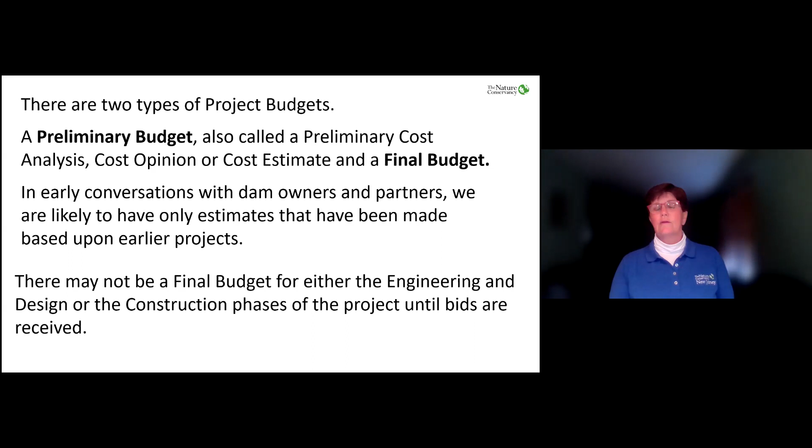And as we step through these early discussions, trying to figure out what exactly our budget is going to look like, one of the most common things that we do is turn to other similar recent dam removals that are local to the one we're working on and try to get a look or talk to our partners about that project budget. It's important to know that, and you kind of have to get comfortable with the fact that you don't really have a final budget until you bid the job, because the professionals who are actually doing the work, whether it's the engineers or the contractors, are going to bid based on the current situation, current cost of things, and in the case of the engineer, your specific regulatory environment. So you'll be fairly far along before you get a final budget.

I think, like all models, they are useful. However, it's going to really be focused on the stripped down version of a dam removal. So you can get in trouble using these budgets if you rely too heavily upon them. So I think that they are useful in the sense that they will give you kind of the lowball estimate.

But where you can get in trouble using these estimates is to kind of believe that you're seeing the full picture. What you'll need to do is to pull out those features about your specific dam removal that might bring the cost up, and really explore those issues. And our next presenter will give some examples of those factors that can influence costs and how to avoid underestimating those costs. Be aware that the issues will vary regionally. It depends on the characteristic of rivers, the concentration of infrastructure, and the regulatory environment that you're dealing with.

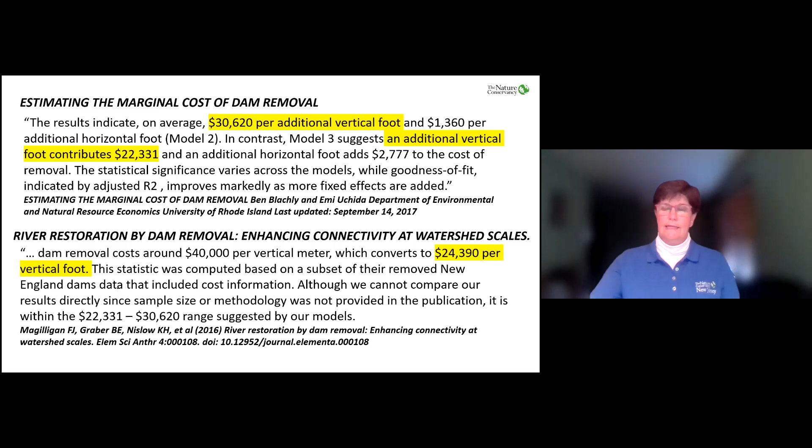So I realize that up to this point, I seem to have said, you really need an estimate. Here's a way to get an estimate, but don't use this way to get an estimate. So not very helpful. So I'm going to kind of step through a little bit of how exactly we go through that very early estimate. So again, with help from partners, we try to just figure out what line items are going to be in my budget when I look at this particular dam removal. Then I'm going to look to similar recent projects in the region to get the costs that would be associated with those line items. And that is going to get me to a preliminary budget.

So here's some examples. Do I need a mussel survey on this specific dam? Is it hard to get in? Am I going to have to build an access road, clear an access road? Is it steep? Or maybe we're going to just pull up right next to the dam. Is there a lot of sediment? Is there nearby infrastructure? These are things that partners and owners can brainstorm together.

So if you know that you may have these issues, then you can start to figure out, what is it going to cost me to truck sediment? Is it clean sediment? Very different price than if it is not clean sediment. What is engineering and design going to cost? What does permitting cost on a similar project? So again, we take all of those pieces, working with partners, and that allows us to create a preliminary budget.

So if you get this far and you have a preliminary budget that seems to make sense, and the dam owner and partners that you're working with are comfortable with this, saying, okay, that is whatever, $500,000, yeah, I think that we can do that. At that point is when you really need to start to nail down those costs, because once you start to seek funding, you're going to need more than what I've just explained when you're reaching out to funders.

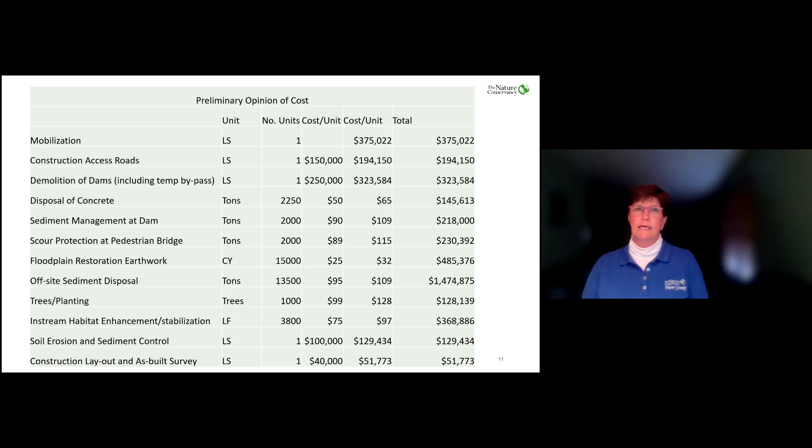But also, I think there are a ton of partners out there that you can reach out to. Certainly, it's what we do all the time. Hey, you just did something where you had to go down steep slopes, clear half a mile of trail. What did that run? You can start to get these ballparks from folks.

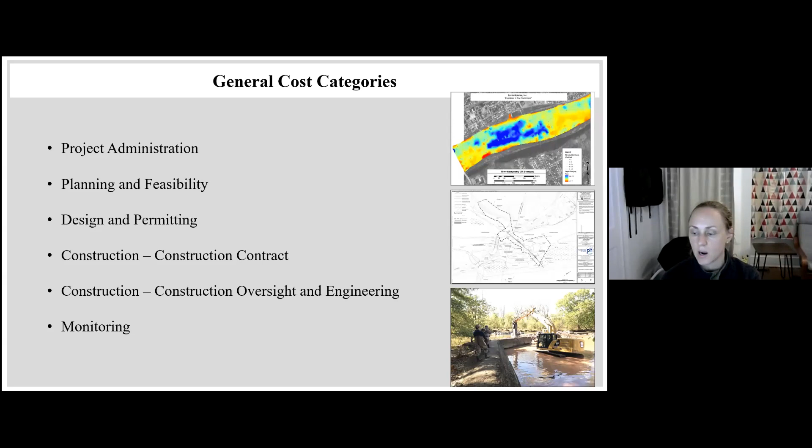Yes, today I'm just going to talk about basically general dam removal costs and cost categories, and try to give you a rough eyeball method that you can use, so you can go out into the field and kind of eyeball the magnitude of dam removal costs that you may be looking at.

On this slide, these are just general cost categories that apply to most dam removal projects. Costs can vary widely based on project-specific complexities or by region, as we know. And these categories can be lumped together or broken down in slightly different fashions, but in some sense, they're what we typically see for a dam removal project.

First, we have project administration costs. We do know that dam removals take a lot of administrative time, but despite this being a significant cost for project development and management, administrative costs are often overlooked or simply not calculated. Internally, in discussions I've had with other service members and with other federal agencies, frankly, we just don't have a great grasp on this, and often our time is not tracked.

We also have costs associated with planning and feasibility. So again, as Beth said, that's mapping, H&H studies, geomorph, bathymetry, sediment analysis. This is usually where we're getting a conceptual design and getting an initial cost estimate.

We also have costs associated with final design, permitting, and compliance, and costs associated with construction. A lot of times we break up construction into our actual construction contract. And again, as Beth mentioned, I'm emphasizing here, we don't really know our final project cost until we get that project out to bid. Also for construction, we typically have costs associated with oversight and engineering.

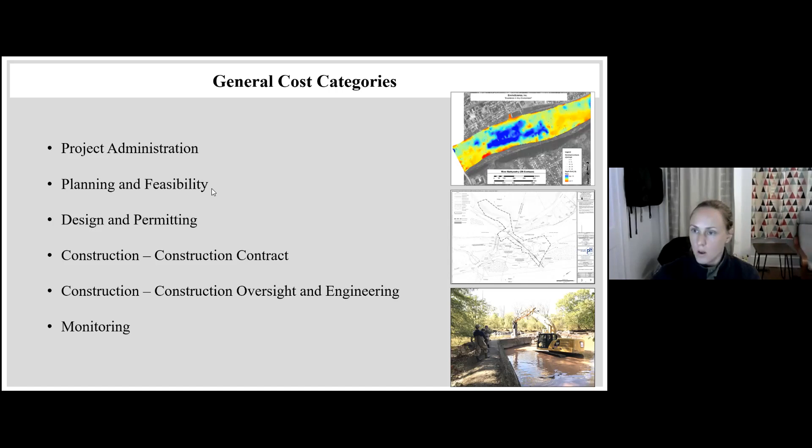Okay, so what I'm presenting now is hardly scientific or peer reviewed, but it's a decent way to start just thinking about factors that influence dam removal costs. When I go out to a site, some of the major issues that I think about on that initial visit are, number one, dam size and dam type. Typically, the bigger the dam, the higher the cost. And typically also concrete and other structures of dams are more expensive than earthen removals or timber crib removals.

I look at site access. Can we get equipment into the site? Do we have a reasonable staging area? Because difficult access can mean higher cost. Again, as Beth said, I look at sediment. Is there a lot to deal with or a little? Are there indications that it might be clean or it might be contaminated? Because costs associated with dredging, removal, and disposal of sediment can get quite high.

I also look around at the surrounding area for infrastructure. Are there major potential elements to contend with? Are there roads and bridges that may require scour protection? Are there other infrastructure elements like pipelines that may need to be moved or dealt with otherwise? So those are some of the major issues that I look at.

Other issues that are in no way small beans, but should also be considered, are dam ownership. What do we know? Do we have access? Is it possible that we may have to do some kind of buyout or easement? Species of concern, for example, do we need to do mussel surveys and relocation or any kind of other special measures for imperiled taxa?

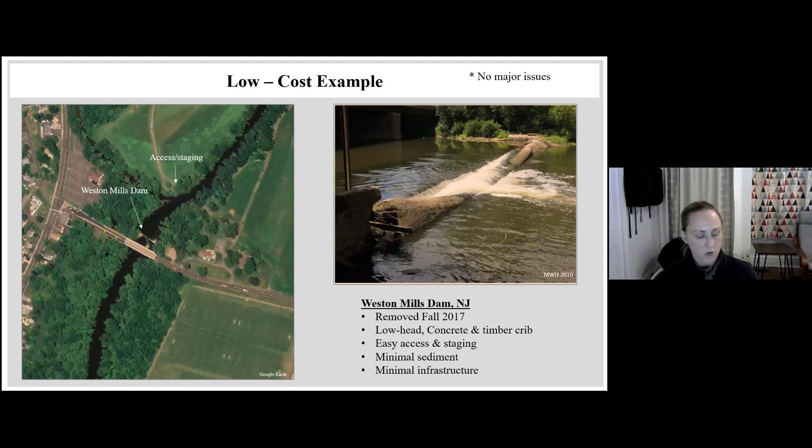We did have some infrastructure, but that included a county bridge that required minimal scour protection. And then we were going to leave some residual dam walls, abutment walls that required a little bit of scour protection. So the overall design here was basic dam removal, minimal scour protection around the bridge and abutment walls. As far as those other issue costs, there really were none associated with this project.

So the cost estimate on this one, again, in New Jersey, Northeastern region, was about $1.5 million total. That's in 2017 dollars. Administrative costs, completely unknown. We have no idea. We didn't track them. Feasibility cost was around $250,000, design $150,000, construction itself around $1 million, and then monitoring $150,000.

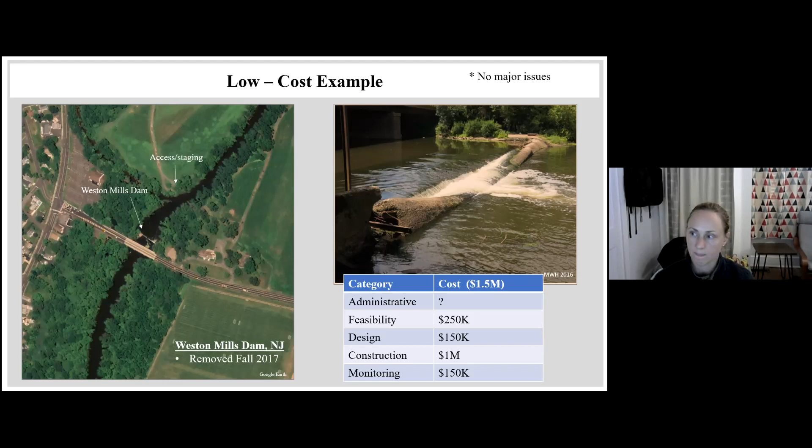So next, I'm jumping to an intermediate cost example. This is the Nunn's Mill Dam on the South Branch Raritan River, again in New Jersey. This is underway but not complete. So the dam size, the entire dam was 150 feet long. That included a 40-foot concrete gravity spillway that's about 6 feet high, and then a 110-foot concrete and earthen embankment extension off of that. This thing retained about a 3-acre impoundment that's heavily sediment laden.

Access here, very easy. Staging can be done on privately owned land, but it will require an access road of about 300 feet. Sediment is the big issue with this project. We have extensive sediment in the impoundment, and it's possible but yet unknown if we can reuse or dispose of it on site. Infrastructure is kind of an intermediate problem here. We have a downstream county bridge that's going to require some scour protection, and we have some properties that may also require some flooding protection.

So the general design is a little bit up in the air, but it'll probably be a basic dam removal. We're going to realign the river to its native channel, and we'll have to do some manipulation of the sediment to either reuse it or dispose of it on site.

As far as our other issues, costs, we have possible species of concerns. We'll probably have to do a mussel survey and relocation, which can run 10 to 30,000 in our area. This is located in a historic district, so there will be costs associated with cultural resources. And because of the sediment, it's likely that we'll have some adaptive management contingencies where we might have to do future construction actions dealing with sediment management.

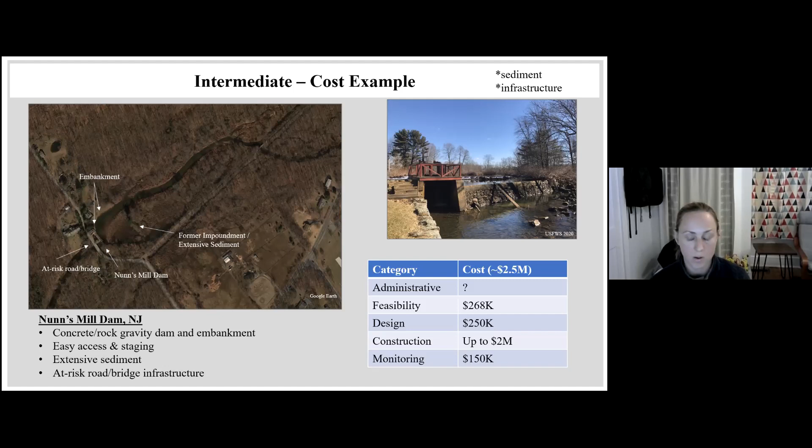Our cost estimate on this one to date is around $2.5 million. Again, administrative cost unknown, feasibility around $270,000, design $250,000, construction up to $2 million. It really depends on how we deal with the sediment, and monitoring again around $150,000.

This is the second intermediate cost example. This is the Headgates Dam on the main stem Raritan River. This project's not complete, but we have a lot of information. So dam size, kind of a medium-sized dam. It's a low head, about 250 feet long, 14 feet high. Access is intermediately difficult. We're going to have to build an access road of about a half a mile, but it's on very flat terrain. Sediment on this one is very minimal, so not a big issue.

And then we have infrastructure, and this is our big problem on this dam. We know that there's a major 54-inch sewer line located about 90 feet upstream of this dam. So when that dam's removed, the sewer line that is now buried is going to be exposed, and it's at risk of integrity loss. We also have an adjacent historic power canal, and we know we're going to have to modify the intake structures on that power canal to maintain historical and recreational use of the neighboring property.

So the overall design here is it's a little bit bigger dam. So we're going to do a dam removal with likely coffer dam installs. We're definitely going to have to relocate that sewer line, rebury it, and do modifications to the power intake structures on the power canal. For other cost issues here that we've identified, this is adjacent to two historic districts. So there's going to be cultural resource costs. And we also think there may be some possible community resistance on this dam.

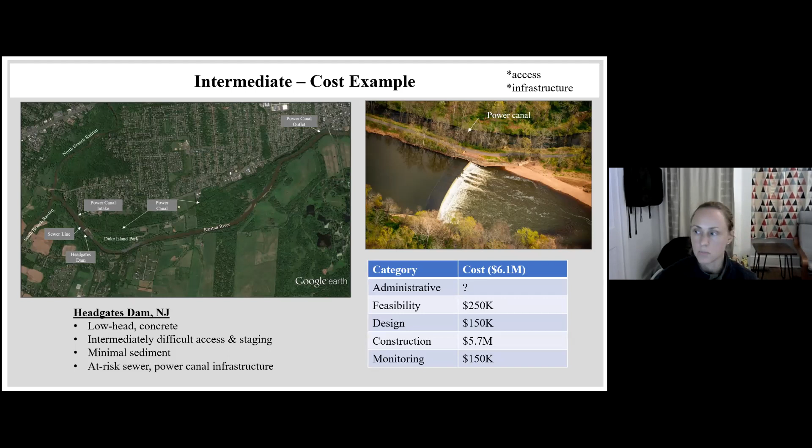Overall cost estimate is going to be 6.1 million total, including unknown administrative cost, feasibility already been done around 250, design 150,000, construction total around 5.7 million. That includes 1.1 million for the dam and about 2 to 2.3 million each for that sewer line relocation and modifying the power intake structures on the power canal. And then monitoring approximately 150, maybe a little more.

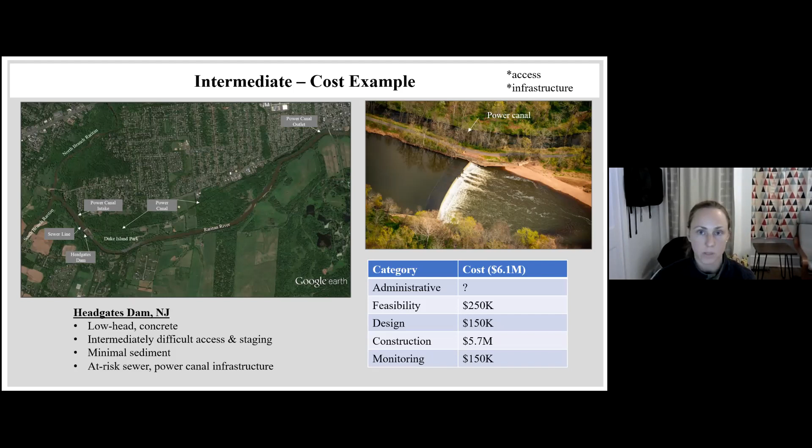Next, I'm moving on to a high cost example. This is the Columbia Dam on the Paulinskill River in New Jersey. This one was removed in 2020. Dam size here, we're actually dealing with two dams on this project. One was just a breached remnant dam that was located downstream. And then we had the Columbia Dam, which is our primary dam, which was intact and pretty large. It was 310 feet long, 18 feet high, and it retained about a 45-acre impoundment. For this, I'm going to actually talk about the design first, because this was a complicated project, and then I'll get into access and sediment.

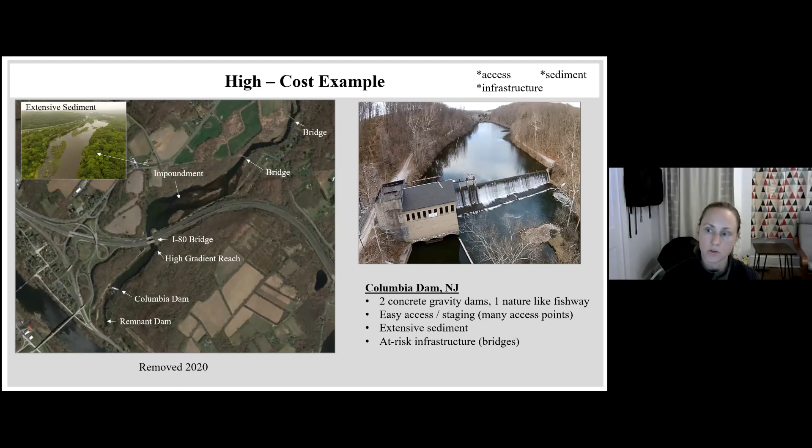But this project included two dam removals, an extensive impoundment drawdown, extensive scour protection along 3 bridges, one of which was Interstate 80, which is a major bridge that runs from California to New York, and also at 2 upstream bridges, one of which was a historic bridge. We had to do a nature-like fishway install underneath the Interstate 80 bridge because our feasibility showed that that was going to be a really high gradient, high velocity area after dam removal. So it was going to be unable to pass fish. So we had to do a fish passage install. And we also had to do extensive channel restoration and extensive impoundment replanting.

So now back to our major factors here. For access for this project, it was actually easy access, easy staging. However, we had multiple access points to contend with to complete all of our work. For sediment, looking at this one, extensive sediment in the former 45-acre impoundment. However, we got a little bit lucky and no offsite disposal of sediment. We were able to dispose of or stabilize it in situ.

Infrastructure was another real biggie. As I mentioned on this project, we had extensive at-risk infrastructure with those 3 bridges, which required a lot of scour protection. We also had a multitude of other cost issues on this one. We had mussel surveys and relocation that ran about 30,000. We had cultural resources. We had 3 historic properties on site, including the dam and powerhouse itself.

We had a dam ownership cost. We had a FERC license buyout. We had very high community resistance, so we had to do a lot of outreach on this one. We had monitoring, permit, and otherwise required for this one.

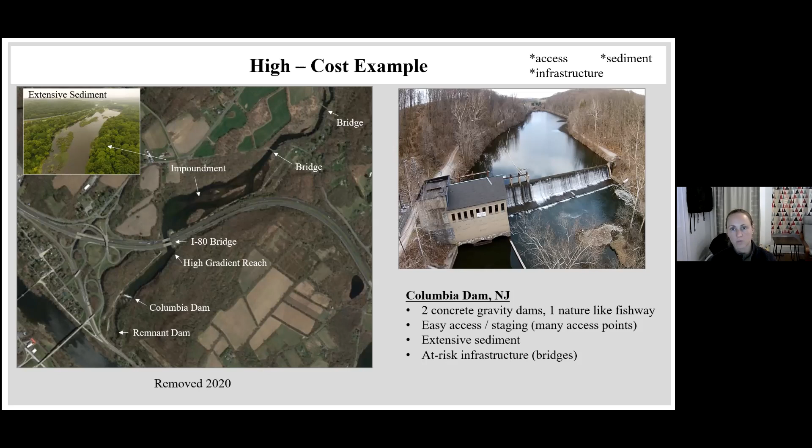We had potential for high adaptive management costs, which we didn't have to do, but there was potential high costs with future modifications that may have occurred. We had impoundment issues. We had a long drawdown process. And again, as I mentioned, we had fish passage issues associated with cost in that high gradient area and having to do modifications for a nature-like fishway.

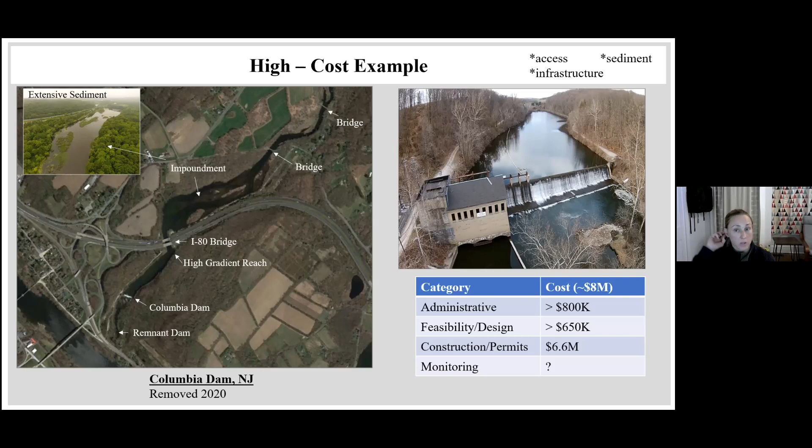Total costs for this project were around $8+ million. These are lumped a little bit differently than the others, but administrative costs, again, were quantified for some entities but not others, but we know that it was greater than 800,000. Feasibility costs, FERC license buyout, and design were at least 650, but more, because not all the costs were accounted for since there was a lot of in-kind work. We had construction and permits, which was around 6.6 million. There was a lot of monitoring, but we don't quite have a dollar amount on that one.

And then this is just my last high cost example, then I'll be done. This is the Warren Glen Dam on the Musconetcong River, again in New Jersey. Project not yet complete, but we have a lot of information. So for this one, dam size, very large. It's about 330 feet long and about 38 to 40 feet high. Access, I put this top left picture in here to show you it's kind of remote, at least for New Jersey. It has very difficult access through a gorge area, possible need for a 1+ mile access road through very steep terrain.

This holds back an insane amount of sediment that we're unlikely going to be able to stabilize or reuse or dispose of on site, so it's probably going to have to be hauled off. Also, some problems with infrastructure. The dam itself is a Class 1 high hazard at risk of sunny day breach. And we also have downstream infrastructure that will definitely be damaged if we release too much sediment. So design is a little bit up in the air, but it will definitely entail very difficult access, dealing with a very dangerous existing dam structure, extensive sediment disposal offsite probably, long impoundment drawdown, extensive bypass with cofferdams and other installations, and extensive habitat and fish passage restoration.

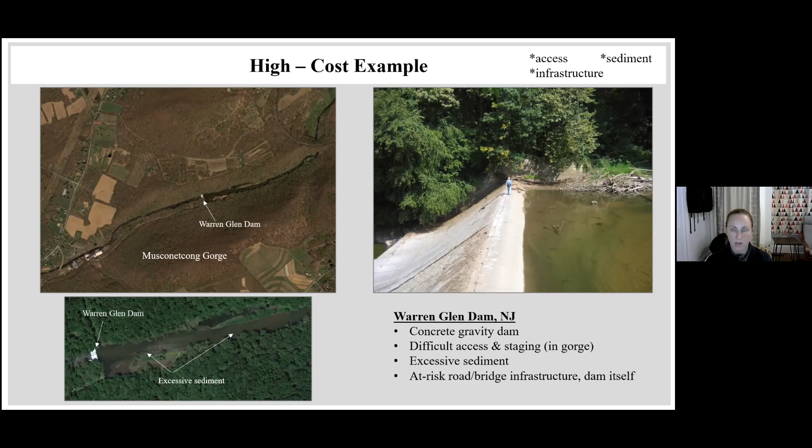As far as other costs, likely costs associated with species of concern, namely mussels. It's not historic costs, except it is adjacent to a wild and scenic reach of the Musconetcong, so there will probably be costs associated with that. Possible community resistance and possible site buyout; we're not sure on that. So this is probably one of our highest costs in New Jersey. We think this one's going to be around 20 million. Administrative costs are kind of a question mark, and we're not great at predicting that. Feasibility minimally 500,000, design very minimally 350,000, and we suspect construction is going to be around 15 million and monitoring 150,000 plus. Thank you.

Hey, Kathy. Yes. Both Beths are talking at you. There was a little bit of a discussion in the chat, and it made me wonder, were these costs done under federal contract? It's a mix and match group. A lot of these that I'm mentioning are being conducted under the Natural Resource Damages Assessment Restoration Program. Some of them were done by responsible party companies. Others were done by the state. Most of them had some federal monies involved, but no, most of them were not under federal contract. All right, great, thank you.

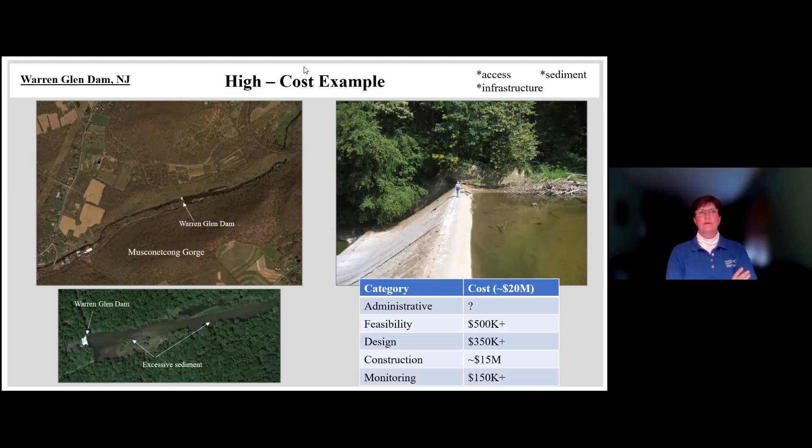I'll introduce Evan while we're getting these last few results in. Evan Madlinger is the State Resource Conservationist with USDA NRCS. Evan is going to talk about developing a budget. It's kind of different when you work with NRCS because they have cost per practice. So they're going to look at your project and come back and tell you what they'll give towards each one of those steps that you may be taking.

So Evan's going to outline that process and also talk about, if I wind up with funding gaps, then what does that mean for my project, and what it's like to actually work by putting a budget together funded by many different entities.

So Michelle, did you end that? Okay, all right, so let's take just another 10 seconds or so to look at that. So currently managing dam removal: yes, no. Yes, I'd like to, but need some training. It looks like that was 50%. So that's exactly the sort of answers that we're looking for. Interested in project manager training, 58 people. So 89% said yes. Again, fantastic information for me to pass along to American Rivers.

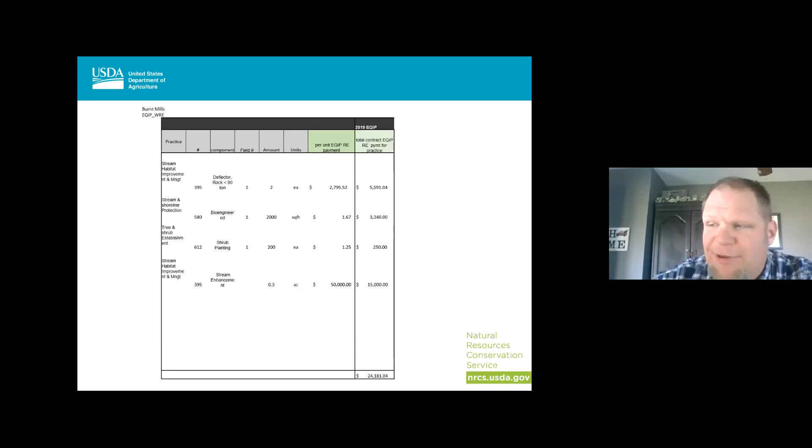The wetland easement portion, kind of similar here. We knew we could pay 100% of the bills, but we gave it an estimate that we're going to need about $25,000 for that portion. And so you can see this is on the smaller end of those projects. We were talking about millions when Kathy was presenting, but we actually got this one out for probably more like 160 or 170 thousand dollars, but we'll talk about some other things with that too. So here's our final one sheet of our final design. We had some other sheets.

We had some more detailed stream habitat improvement, but just to give you an idea of what we're doing there, we were going to channel block off that left channel there and reestablish the main channel where it was historically. We could tell from photos. We're going to shave back that island a little bit, put some material up in the front, get some root wads in there. We had some deflectors, might be a little hard to see, or might not even be on there. And again, there's some other stuff too, something to get into with some other sheets, but just to kind of give you an idea.

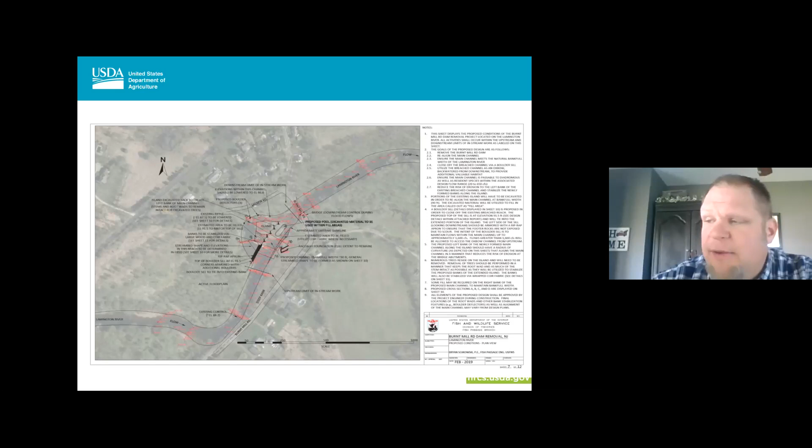And you may notice here that this is an NRCS project, but there's a Fish and Wildlife logo down at the bottom there. And so when we talk about partners, NRCS, we do have our own engineering staff, but it's not very big, and they have a lot of agronomic projects they were working on. So anyway, in this particular case, one of the huge things that U.S. Fish and Wildlife Service helped with is their fish passage engineer actually did this design. So that's just one note, right?

When I said this project was maybe 160, 170 in the end, that engineering was essentially free to the landowner, but somebody paid for that. Tax dollars paid for that, an engineer for U.S. Fish and Wildlife to do that. So in this particular project, that's probably a cost that we're not accounting for here. Kind of what Kathy was saying with administrative costs.

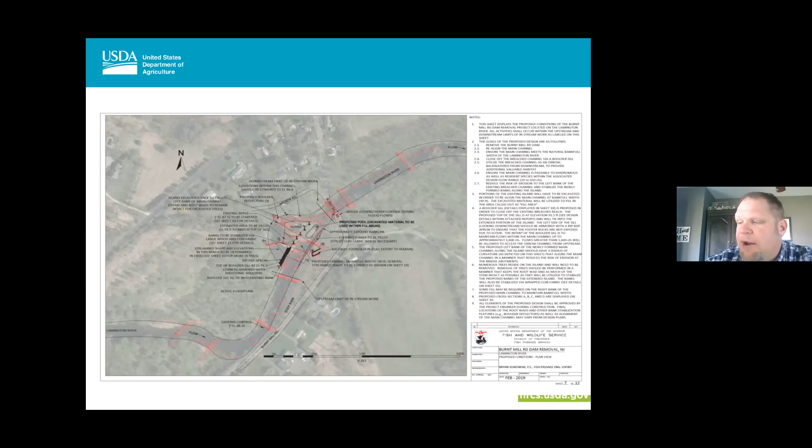Well, in '17, they didn't really have a good layer at the time for aquatic habitat. So when we looked at the Landscape Project, we didn't get any hits for mussels, and we made the assumption that we might be okay here when it comes to mussels. Well, flash forward to when the project was actually getting designed, new layer, we tripped up, we realized we had some mussels here. And not only that, they had done some extensive monitoring work for mussels here. So this turned out to be a major thing that we had to work with on this project.

To the point where Division of Fish and Wildlife wasn't even sure they were going to let us do this project. It took several sit-down meetings, a lot of back and forth, some modifications of the project. We had to really minimize our stream habitat work upstream and downstream. It really had some implications with the sediment that was accumulated there and how that was going to get treated.

And so this is where U.S. Fish and Wildlife came in huge, because I was able to sit at the table, not just myself and NRCS folks, but we had U.S. Fish and Wildlife there. And between the two federal agencies, we were really able to gain the confidence of Jersey Fish and Wildlife and gain their support for this project. So that was huge.

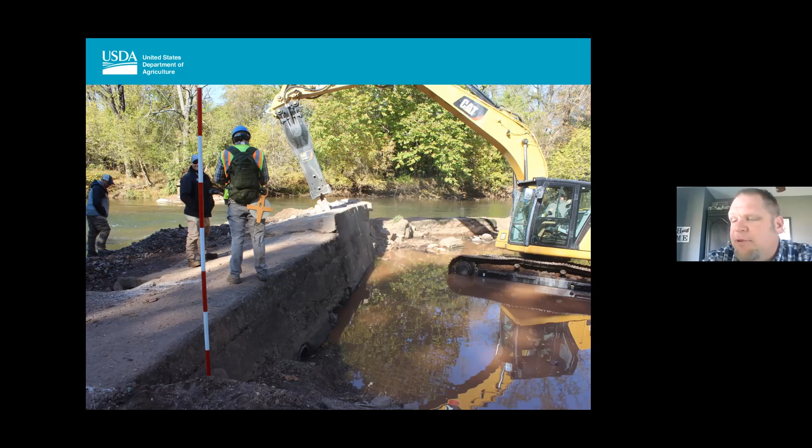So fortunately, this thing was in pretty rough shape and it did break apart a lot easier than it started looking like in the beginning. But I started sweating some bullets here too, because this was starting to look like it was going to take a lot more time to take this dam out than we originally thought. And having the machinery on site and the time and the labor, I was starting to get a little nervous. This could add up quickly. But again, it did actually end up coming out relatively quickly. But again, one of those things that all these experts on site, myself included, looking at these things, you didn't really know until we got into it that it wasn't exactly what we thought it was.

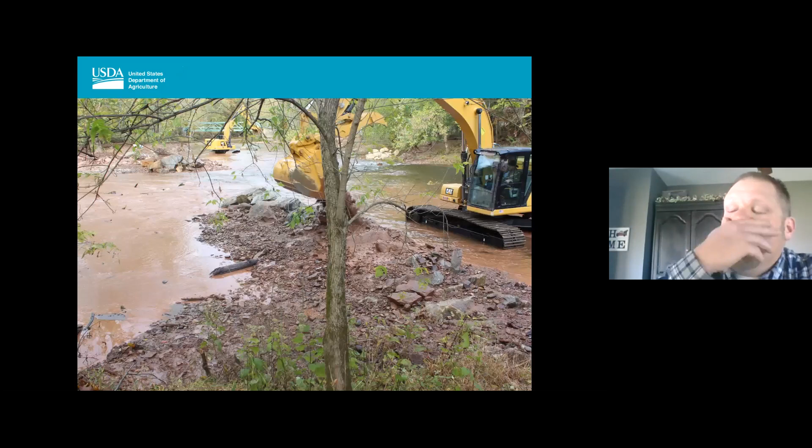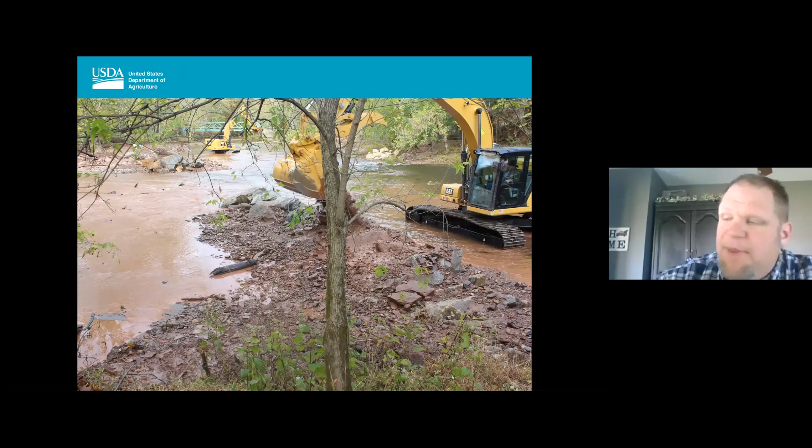This is a picture of them building the channel block. And what I really want to call your attention to here is you can see the rock here in the foreground of the picture, and then in the background, you might see some more rock over there to the left and to the right. And that's kind of a big thing. Rock is something that sometimes keeps me up at night on these projects. There's so many factors that can affect getting rock, and you almost always need rock, whether it's a dam removal or even a stream restoration project.

We really strive to use more natural rock that would be more similar to the site. And where are you going to get that? Are you going to buy that from a quarry? Sometimes in New Jersey, we can get this rock for free if you have good connections on a construction site, but you still have to truck it there. And trucking's expensive. These big rocks tend to beat up the trucks. You can't fit a lot on a load. So in this particular site, I would say we actually did pretty good. We got the rock for free, but we were paying about $900 for a load of rock. And that was about 25 tons per roll off. I think we ended up with 20 loads of rock.

And the hard thing, and I just want to point this out, you all know about supply chain issues and fuel and trucking right now, and those are all going up. Continue to go up. I doubt you'll get a $900 load right now. And again, that was free. We weren't buying that from the quarry. So definitely something that you need to think about in these projects, because almost all of them need some element of large rock to help stabilize things and create riffles. So I want to point that out. And I would also add that you never have enough rock.